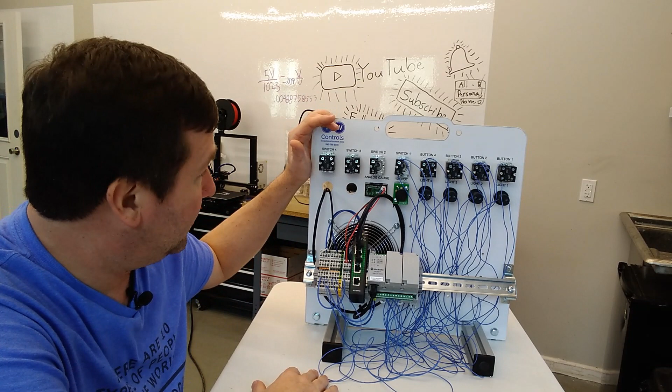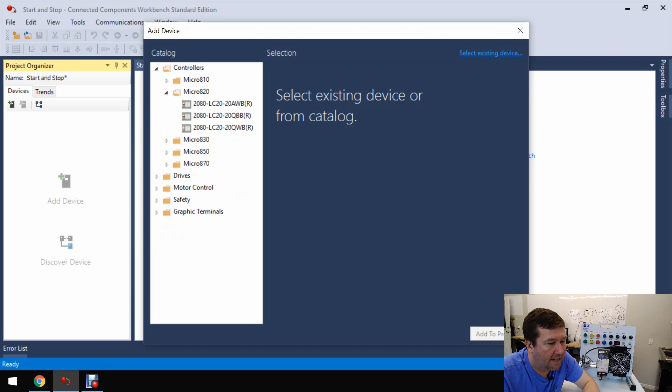For this video, we're going to be using our Micro800 PLC trainer, and it is still wired per our Getting Started guide. So let's get started. Let's open up a new program in the Connected Components Workbench software, and we'll just call it Start and Stop. And go to Controllers, then Micro820, and we have a 2080 LC20 20 QWB. Version 11, select, Add to Project.

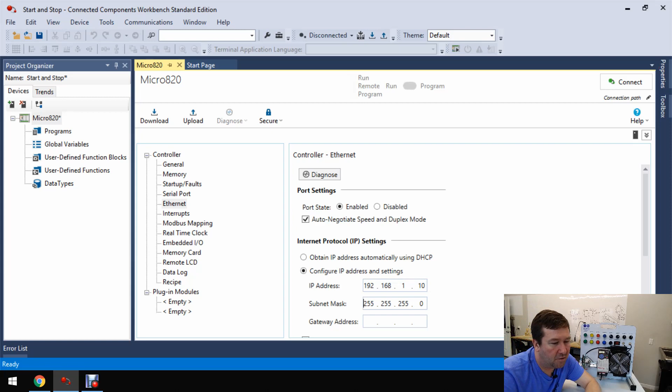And let's go down to that Ethernet configuration and go ahead and configure our IP address for 192.168.1.10 with a subnet of 255.255.255.0. Now let's right-click Programs, Add Ladder Diagram.

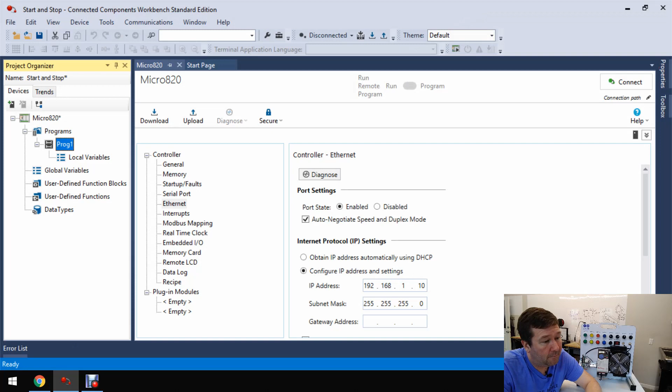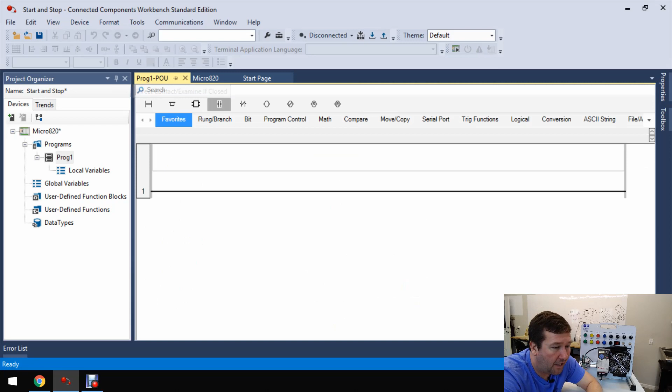Let's go ahead and open up Program 1. And everything we're going to need is going to be in this Favorites tab, or at least by default it is. So let's bring down a direct contact, examine if closed, and then let's go to our I/O Micro820 tab, and then we're going to be looking at our green button, and that's going to be our start, and that's input 4, so let's make that our start button, and then button 6 we're going to use for our stop.

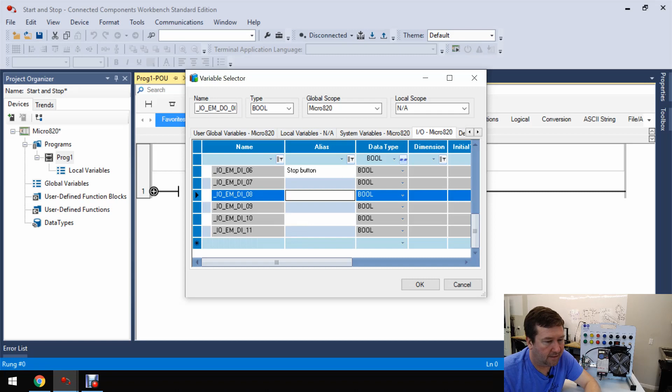That's our red button. Up here, output 0 is our green light, and we'll just use that to represent our motor load. Now let's go ahead and select that start button. All right, now let's use a direct coil output energize and go back to our I/O Micro820, and this time we're gonna hit the green light.

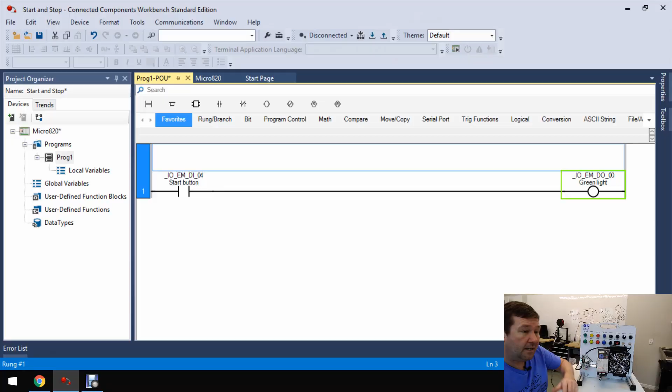Now this is rung 1 of our bit instruction lesson where you press the green button and the green light came on, and you let off the green button and the green light went off. So what we're gonna do is we're gonna add a branch around this to hold the green light in or seal it in. So let's hit this branch, which is the second instruction here, and drag it down. And then we want to use a reverse contact, examine if open. And we're going to go to our I/O Micro820 tab, and we're going to hit the stop button.

Now, some of you are going to jump on me right away and say, hey, Tim, you can't use a normally closed contact on the stop button. Well, first, there's nothing illegal that says you can't. Now, whether it's a good idea or a bad idea, we're actually going to go through that in a future video. We're going to talk about different contact configurations and different instruction types and how they affect that stop button, mainly during power failures, during wire breaks, wire shorts, things like that.

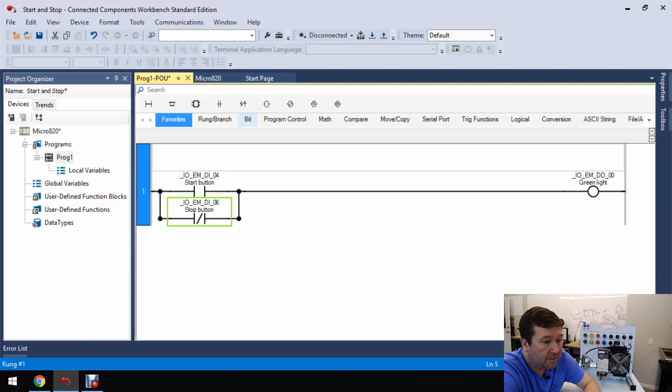But for now, the main reason we are doing it this way is because our trainer is still wired by our Getting Started exercise that we did. So it is a normally open stop button. So now let's drag down a direct contact, examine if closed.

And go to our I/O tab, and this time we are going to come up here and select our green light. Now if you're new, you may say, well wait, that's an output, you can't use it on an input instruction. Like I said in my bit instruction video, this instruction just goes and looks for a 1, or for a checkbox in the case of the Micro800.

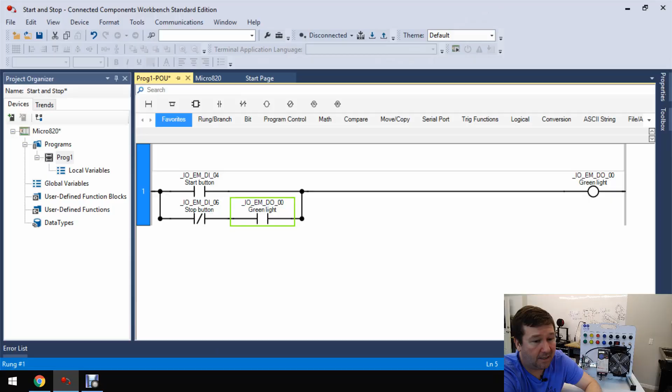Wherever this instruction is, it doesn't care if it's an input instruction, an output instruction, a timer instruction, counter instruction, internal, whatever. It just goes and looks for a 1 or that checkbox. All right, let's go ahead and download this and see how it works. Again, I have videos on how to download that I'll put in the description.

Okay, let's press and hold the green button, and yes, the green light does come on. Now let's let off of the green button, and the green light stays on. Now let's press the red button, and the green light goes out, and let's let off of it, and the green light stays out.

Now I'm actually gonna paste a video that we did for the RSLogix 500 version of this video, because it has a step feature that I use to really break down the PLC scan cycle into single scans. And it really did a good job of explaining this. That feature is not available in the Micro 820, but the principles work exactly the same. But before I start that, let's make sure we do understand, at least on the basics, what's going on here.

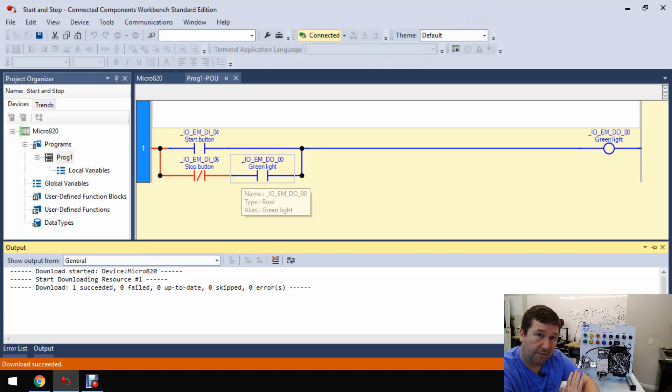So no buttons pressed, green light off. This instruction goes and looks for a 1 or a checkbox. Where? At input 4. Do I have one? No, so it is false. Then it comes to this branch, and when it comes to an end of the branch, it goes down to the beginning of the next branch, and this instruction says, go look for a 0 or an unchecked box. Where? At input 6. Then this instruction says, go look for a 1 or a checkbox.

Where? At output 0. Do I have one? No. So it's going to be false. It comes back to the branch, and then it looks and says, did I have any continuous paths of true from left to right of any of my branches? And it didn't. So it's going to pass false conditions on, which is going to go to this direct coil. False direct coil goes and writes a 0. Where? To output 0. And that's why the green light is off.

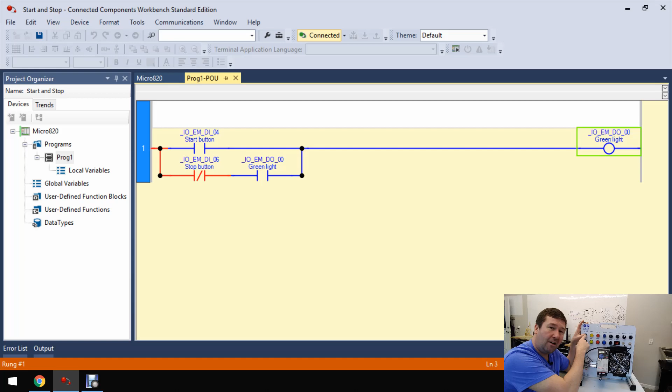So now let's press the green button. And here's where my RSLogix 500 video does a little better, because I can't stop it to really talk through the single scan easily. So let's press it though. This instruction is going to say, go look for a 1 or a checkbox. Where? At input 4. Do I have one? Yes, so it's going to be true. And it's going to pass true conditions on. Now, just because it's true, it doesn't say, well, let me just move on. No, it's still going to go back to the beginning of the next branch.

The stop button, this instruction is going to say, go look for a 0. Where? At input 6. Do I have one? Yeah, so it's going to be true. Then it goes on to this instruction, which says, go look for a 1. Where? At output 0. Now, here's where it's tricky. For that very split moment, that first scan where I press this button, this is actually false because the green light wasn't on yet. So this is going to be false. So let's just imagine it's false. Like I said, I'm going to go through this in a lot more detail in a second.

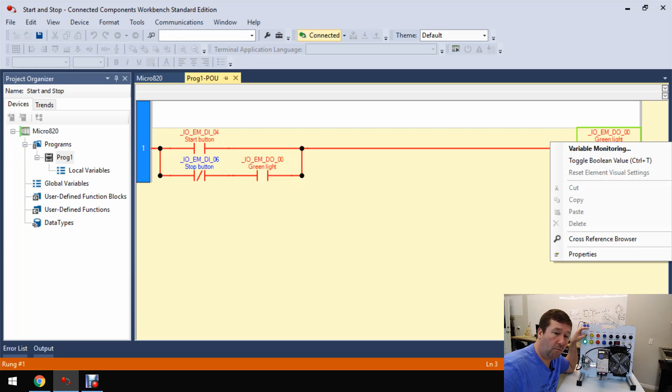So then it's going to go on to here, and it's going to say, do I have a continuous path of true from left to right? This branch is true from left to right. This one isn't actually true yet. So it's going to go to the green light with true conditions, and it's going to say, go write a 1. Where? To output 0. And that is going to turn on our green light. Now the second scan, like a millisecond later, all of this is still exactly the same, except now this lower branch is going to be true because that green light is now a 1.

Now when we let off of the green button, this instruction says, go look for a 1. Where? At input 4. Do I have one? No, so it's going to be false. It gets to the end of the branch, it's going to go down to the next level. This instruction says, go look for a 0. Where? At input 6. Do I have one? Yes, so it is true.

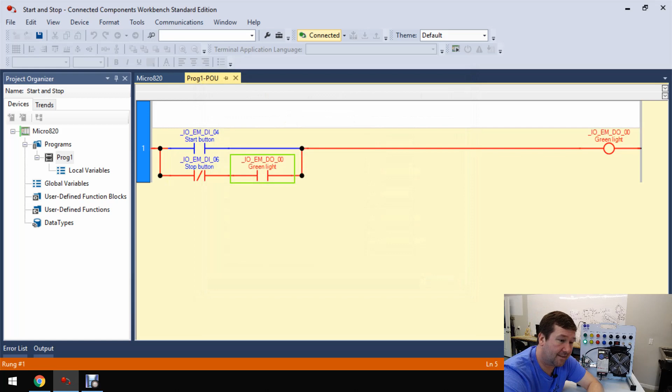It's going to go to this instruction and it says, go look for a 1. Where? At the green light. Do I have one? Yes, so this instruction is true. So now this lower branch, or that seal-in, is true. It's going to pass true conditions on, go write a 1 to the green light. Now again, this is one the video I'm going to show you does a lot better, but we press the stop button.

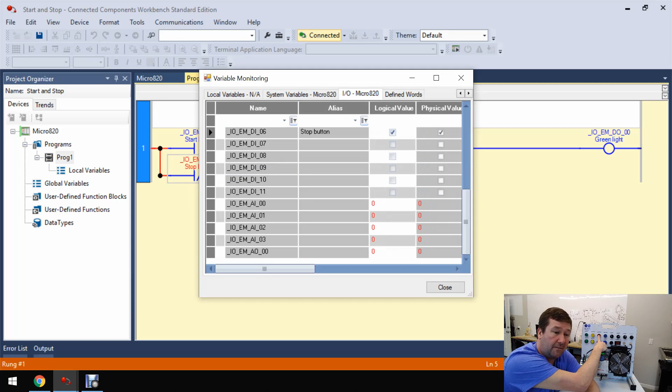That moment we press it, this instruction still is going to go look for a 1 where? At input 4. Do I have one? No, so it's going to be false. So this instruction is going to say, go look for a 0 where? At input 6. Do I have one? No, so it's going to be false because it was looking for a 0 and it found a 1, so it's false. Now at that split second, this green light is still true.

So this one says go look for a 1 where? At output 0. That first scan, this is true. Then it gets to the branch and it says, did I have a path of continuous trues from left to right? Well, it didn't on this one because the stop button instruction wasn't true. So it's going to pass false conditions on to the direct coil, which is going to go write a 0 to output 0. Now that second scan right afterwards is going to make this green light also false.

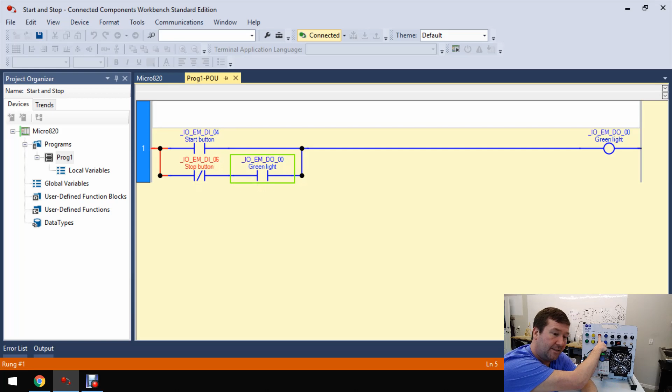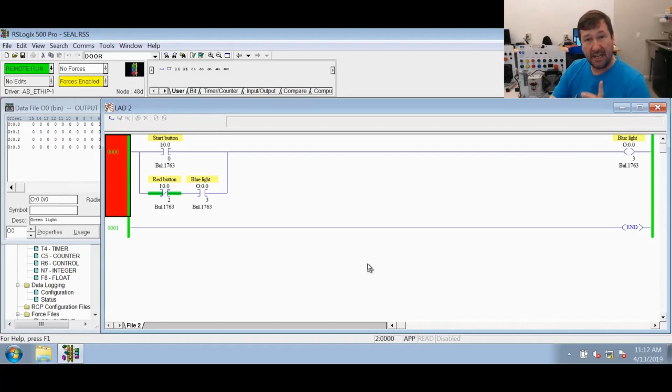So now we're going to roll some footage from that RSLogix 500 version of this video where we actually step through each single scan through this process. And I think it does a great job of explaining it. Let's walk through the steps that it actually goes through. First, the PLC is scanning constantly, probably 200 times a second maybe. And each time it comes around, it goes to the first instruction to the left on the top row. And this one is an XIC instruction, which says, go look for a 1, where? At I:0/0.

Now, if you're not sure how to navigate to it, you can right click right here and you can go to data table. And there it is. It says, do I have a 1? Well, no, I have a 0 right here. So it is going to say it's false. Now remember, and this is where it really becomes important, just because an instruction's false doesn't mean it doesn't do anything. It means it is going to have a false coming out of this instruction.

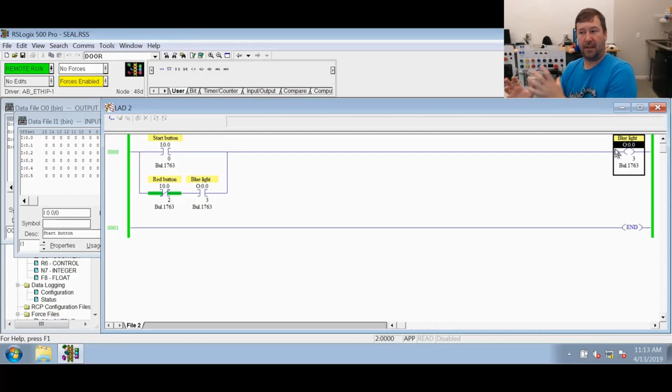But then it gets to this branch right here. It's going to get to the top there and enter this branch. What this branch means is go back to the beginning and go to the next level. So it's going to come back right here. So it does not go from this start button to this output, because you'll hear a lot of people say, well, yeah, it is off, so the output turned off, but then the next one turned it on, so it's chattering. It is not chattering. It goes from this start button, it sees this branch right here, and it goes back to right here.

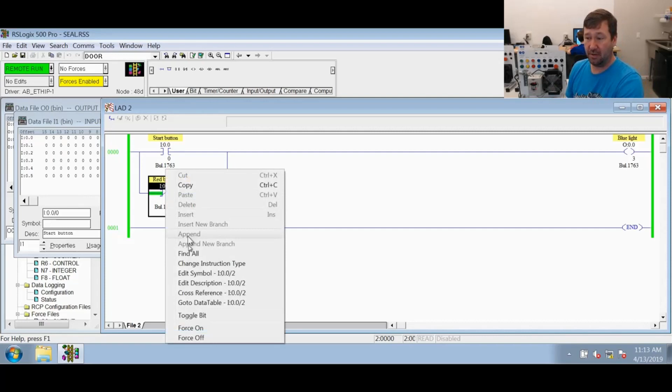And this says, go look for a 0. It doesn't care whether it's connected to a normally open or normally closed. It's an XIO instruction that says go look for a 0, where? At I:0/2. So we'll go to it and it says I have a 0. So this instruction is true and it passes true to the next instruction. This one is saying go look for a 1, where? At O:0/3. Go to it, you see we have a 0.

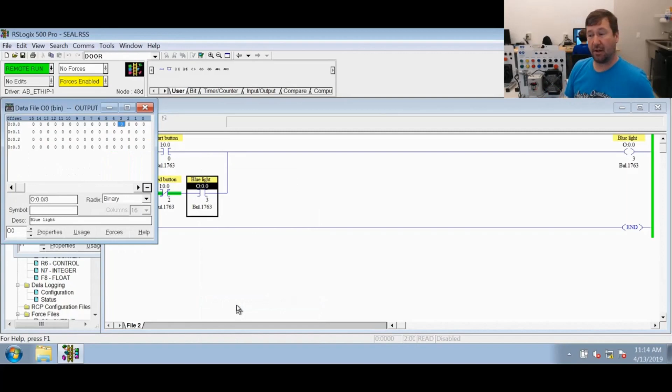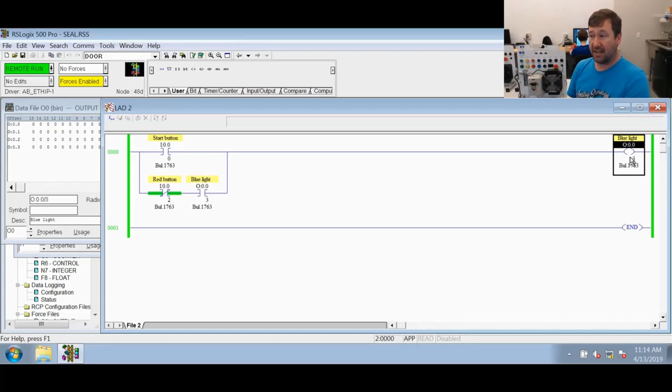So this is false. So now it comes back to this branch right here and it says, well, were any of them true? If you remember, the start right here was false, and now this branch right here is false. So it's going to go to this OTE with false conditions. And an OTE that is false, remember, does something. It says go write a 0, where? At O:0/3. Every time that it comes around to this program, it goes and writes a 0. It has a 0 there, it still writes another 0 over top of it.

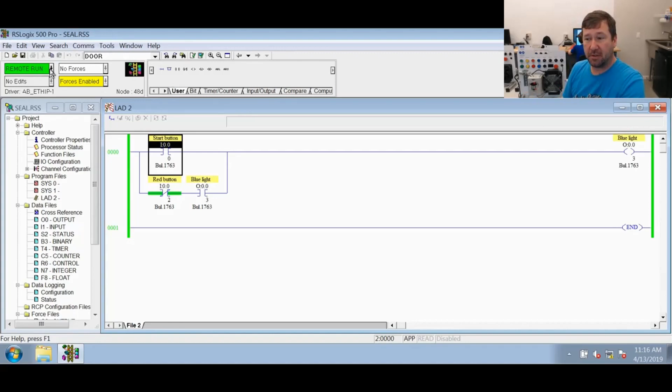And we're actually going to use a feature of RSLogix that I have never found a use for until this video. So don't go out thinking you're going to test machines with this feature. But what we're going to do is go here to where we see remote run, click the down arrow beside it, and click test single. What this is going to do is make this PLC only run one scan. So I'm going to click go single scan. And then you see over here, now it's saying test single.

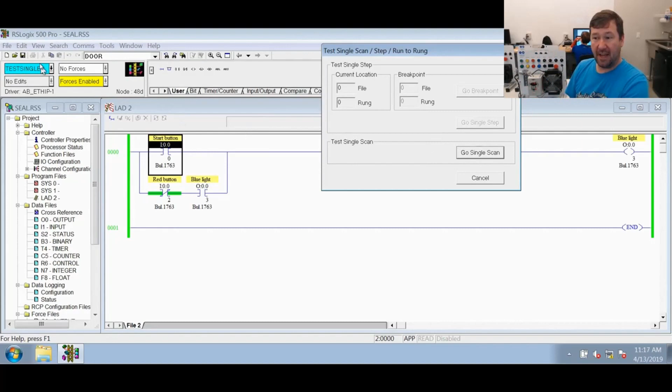So now what we can do is we can go through this scan by scan and just kind of slow down for a second to see what exactly is going on. So what I'm going to do is I'm going to press the start button. Now first, as you see, when I sit here and press this button, nothing's happening in the PLC. And that is because of this test single scan function.

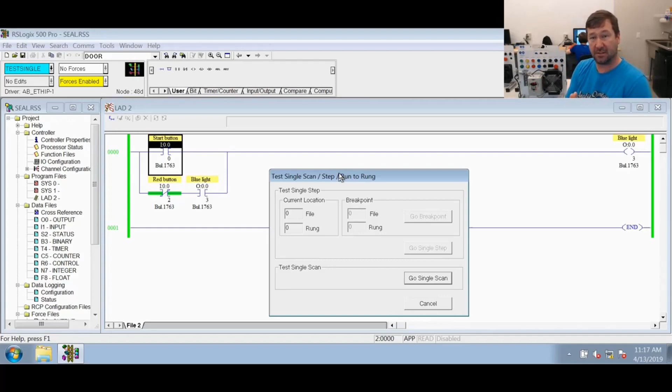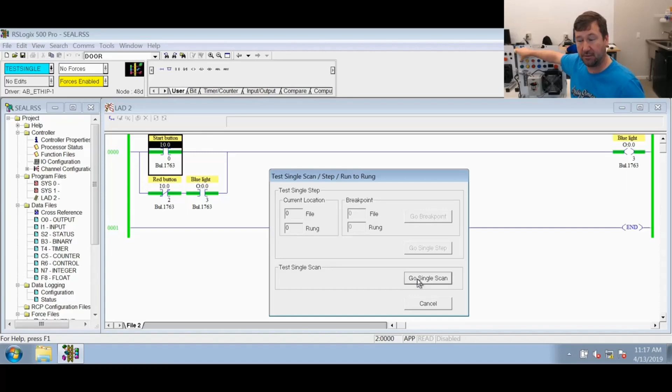So if I hit test single scan, it's going to go through a full scan, which includes reading inputs, updating input data tables, executing code, and updating its outputs. I'm going to press this button, and then I'm going to click Go Single Scan. And you can see that it went through a scan. Now I'm going to let go of this button. Now the PLC doesn't know I have, but mainly my finger will get sore if I don't while I'm talking to you. So we're going to go through exactly what it just did.

So first step, which I kind of skipped on the first round through this, is the first thing it did is it went and read its physical inputs. And so button 1 is connected to I:0/0. And it said, I have current. So it goes here and it wrote a 1 to that input. And it went through all the rest of these. In fact, you can see, oh, there you go, switch 1 was also on. And so it wrote a 1 to it.

Then it started executing its code. And it had this XIC. It said, go look for a 1 where? At I:0/0. Do I have a 1? Yes. So it is true. Now, just because it's true doesn't mean it moves right over here to the blue light. It's still going to get to this branch, come back up, and it's going to scan this one. Now, I'm going to do a little something here because now it's not quite true, and I want to make sure that we fully understand what happened.

At the beginning of this scan, this output was a 0. It was not on. So I am going to toggle this bit because this is really what it looked like at that moment of this scan. So it was true here. It came up here and it got to the red button. The red button is an XIO. It said go look for a 0. Where? At I:0/2. Do I have a 0? Yes. So it is true. It takes it as true and it moves to the next instruction to the right, which is an XIC, and it says go look for a 1.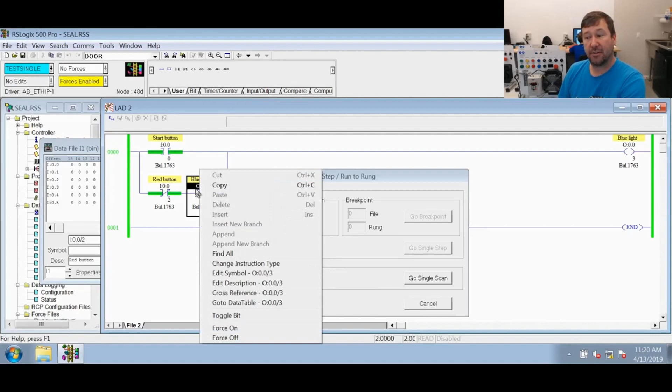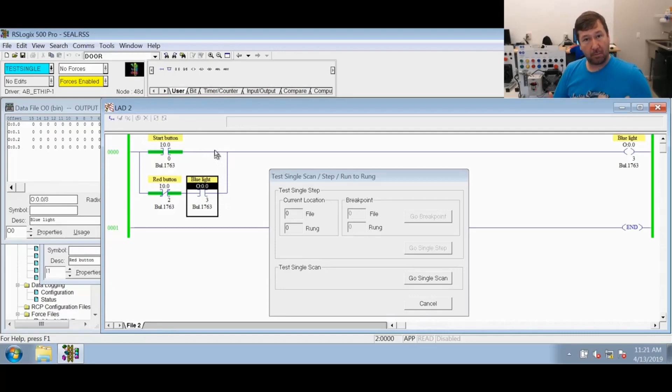Where? At O:0/3. Now it's so very important, even now, that you realize that it's not going and looking at this OTE. It's also not going and looking at this physical output. It is going to look at the data table, and right there you can always right click them and say go to data table, and that's exactly where it's looking. And it does not have a 1, so it is false. So our lower branch here was true. Our top branch was false. Well, on a branch, if you have a true in any of them, then your result is true. And so it passed a true on to the OTE.

Now this OTE executes whether it's true or false. It still executes every time. This time though it's true. So it says go write a 1 at O:0/3. Now again, it is writing to this data table address. It is not writing this physical output. So it went and wrote a 1, and at that point then our rung looked like it does now. Then it keeps coming around to the next rung. It sees this end statement, and at that point it goes and updates its outputs, which included turning on the blue light because O:0/3 was on.

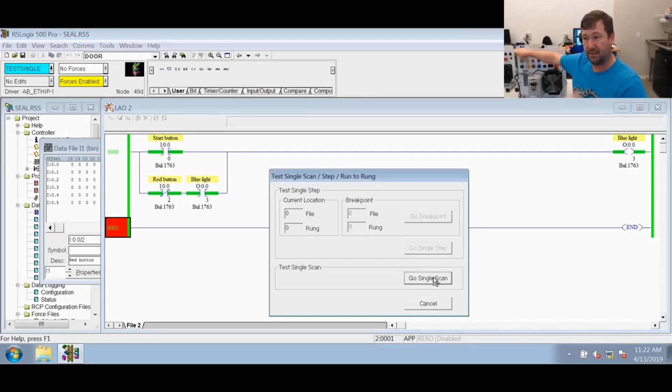Now remember, in the PLC, since we're doing this single step, it still thinks my finger's on it. So I'm going to do another single step with my finger on it, and you see nothing really changed. Now it did the exact same scans we just did. So now I'm going to let off of the button, and we're going to do another single scan.

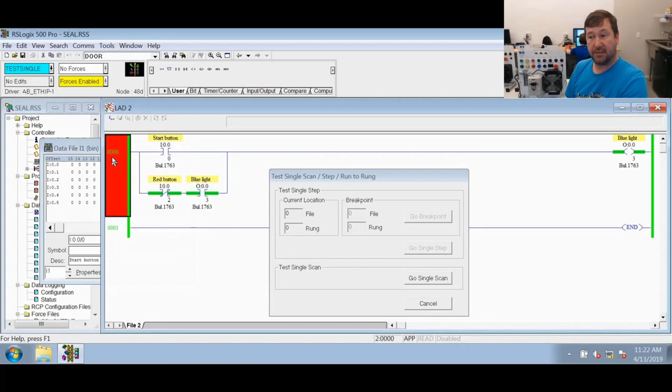So what happened there? First thing, at the beginning of the scan, it went and it read its inputs, including, mainly we're going to focus on this button right here, our green button, which was connected to I:0/0. And now it does not have current because I've let go of the switch, so it wrote a 0 to the data table. Then it went and began executing its code. So our first instruction was an XIC, said go look for a 1. Where? In I:0/0. Do I have a 1? No, I have a 0.

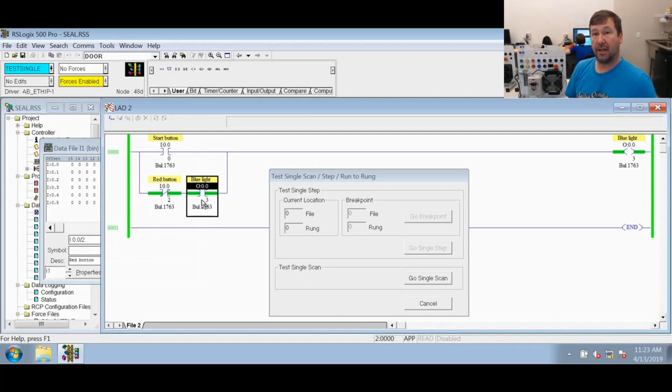So it says false. It gets to its branch here, and it goes back to its next level of its branch, and it sees an XIO instruction. The XIO says go look for a 0. Where? In I:0/2. Do I have a 0? Yes. So it is true. Now the XIC here says go look for a 1. Now again, it is not looking at this blue light. It is not looking at this OTE over here. It says go look for a 1 in O:0/3. Do I have a 1? Yes. So it is true.

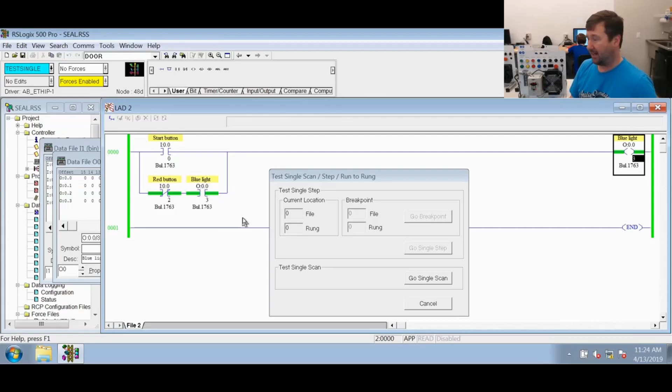So our top branch was false, but our bottom branch was true. So it's going to pass true on to this OTE. So since the OTE is true going in, it says go write a 1. Where? In O:0/3. And that is why our blue light has stayed on even after I've let off the button. Now again, remember, we're doing this single step thing, and guys, besides this video, I have never seen a use for the single step function, so don't go out there doing this normally.

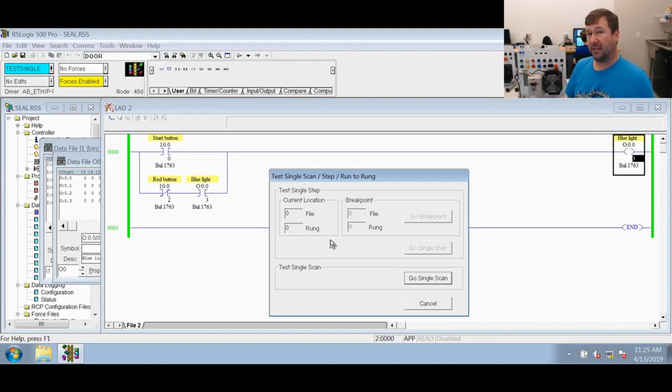Actually, let's go ahead and hit the single scan button again, just so you can see that, yeah, all right, we scanned, nothing happened. So now I'm gonna put my finger on the stop button and I'm gonna press single scan again. Now I can let off the button because it's finished its scan. But what did it do? First it went and read all its inputs. It said, do I have current on each one of those? Now, it doesn't matter if it's a red button, if it's labeled stop, or what it is. All the physical inputs are going to do is say, do I have current? Since I had the red button pressed in, I had current. And that's why if you go over here to the input data table, I:0/2 is a 1.

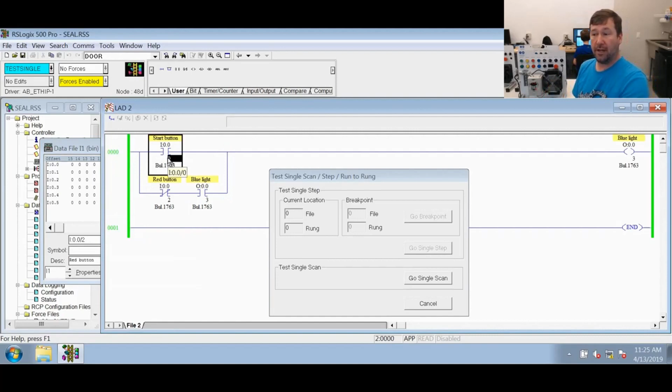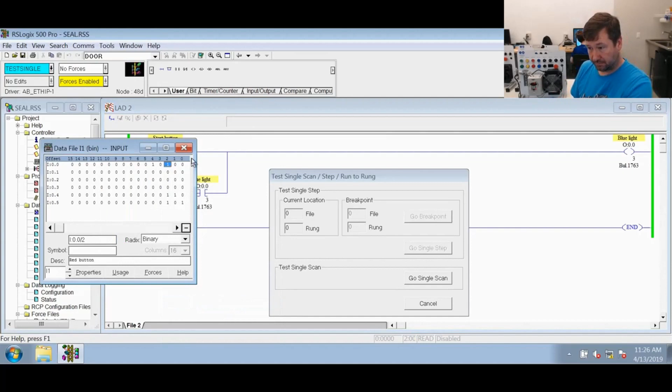So now it goes and it runs, it executes its code again. The XIC says, go look for a 1. Where? In I:0/0. Do I have a 1? No. So this instruction is false. It gets to the end of its branch and it goes to the next level. And it looks at the red button and it says, go look for a 0. Where? In I:0/2. Do I have a 0? No. So it is false. Now, even though it's false here, it still continues to the next instruction.

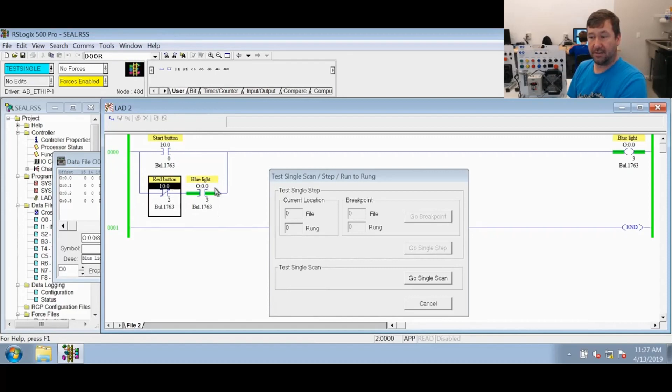And the XIC here is saying, go look for a 1. Now, remember, this light was on at the beginning. So while it's showing off now, when it was going through this part of the instruction, it had a 1 in it. So it says, go look for 1. Where? In O:0/3. We go to the element. Do we have a 1? Yes. So this is true at this moment in the PLC scan. So again, this one was false. This one was true. So it has to have a continuous line of true statements from left to the right to be true.

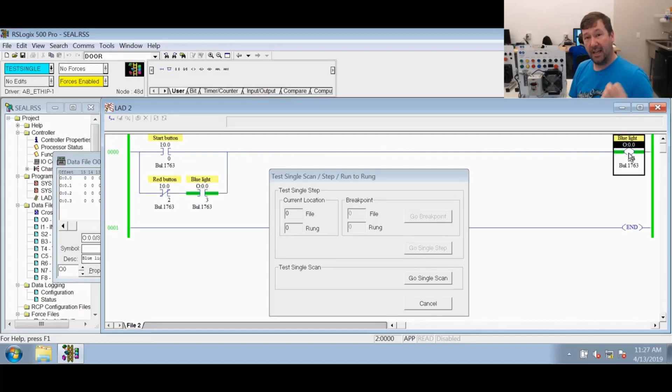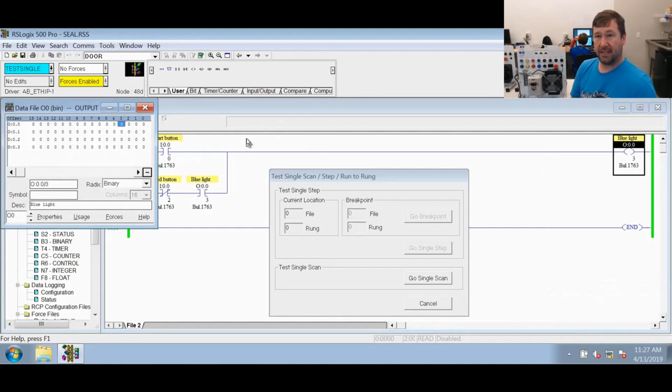So our top rung is false because of this one. Our bottom rung is false because of this one. So it continues over to the OTE with false conditions. And a false OTE says, go write a 0. Where? At O:0/3. Wrote it 0, and that is how it ended up looking like this. Then it goes and updates its outputs based off of that data table. So the PLC then goes to this data table right here. It updates its outputs, which included turning off the blue light. So easy takeaway from this one is obviously now you know how to do a seal in, but the more important takeaway here is really starting to understand those steps the PLC took for that seal in rung to work.